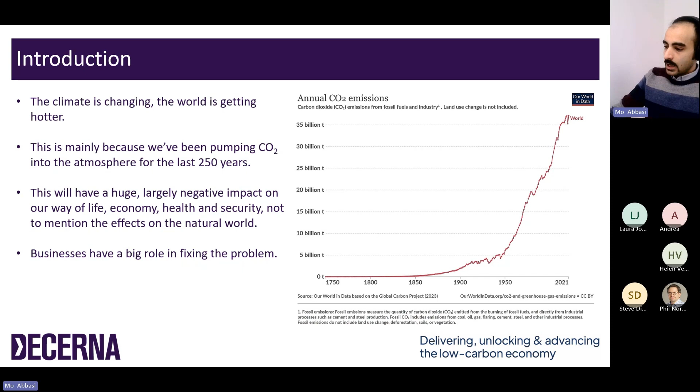Businesses generally play a big part in this, and can prevent or at least decelerate climate change, which apart from the carbon reduction and environmental impact, creates some side financial and other opportunities for your business and company. We will discuss them in the next slides. But why should this matter and why should we care about this?

When it comes to climate change and global warming, every half a degree matters. One might think it's okay, it's only 1 degree Celsius - I personally appreciate it, here in Newcastle it means a longer summer maybe - but it doesn't work like that. Global warming, even in very small temperature rises on a broad global scale, can have devastating results, directly increasing the risk of sea level rise, wildfires, extreme weather, species extinction, pandemics, drought, food insecurity, climate migration, and many other problems globally. All of these consequences are interconnected.

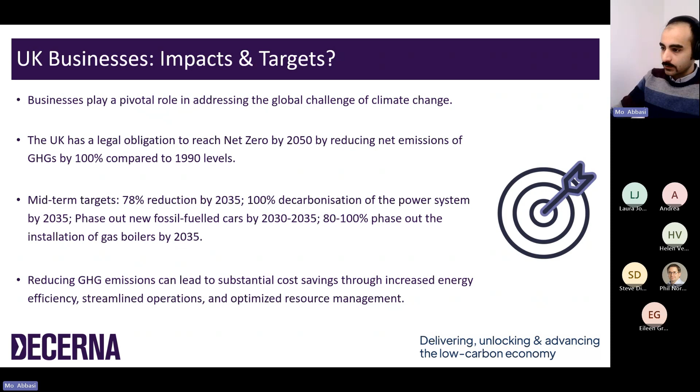These are the midterm targets and commitments in the UK, and businesses are an important part of that journey - they have to adapt to new regulations. Hopefully by the end of this session you will have the information you need to decide what options are available in the market for you to start this journey.

Let's start with some of the main principles we all need to understand before we're able to plan and design our decarbonization plans. The first and probably most important one is the emission scopes, which are the standardized way of categorizing greenhouse gas emissions based on their source. This categorization helps us account for all emissions, avoid double counting, and identify the biggest gaps and opportunities within your business.

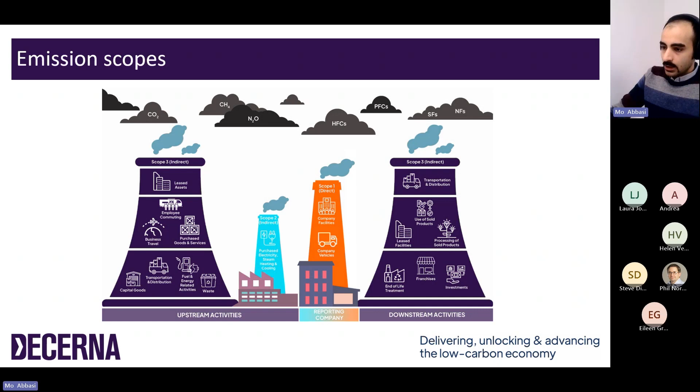But very briefly here: Scope 1 are the direct emissions from sources owned by the company. Scope 2 are indirect emissions from the purchased energy you consume at your premises. And Scope 3 is all indirect emissions from the company's operation phase. So today, the measures we're going to discuss mainly affect Scope 1 and 2 emissions.

Scope 1 covers the emissions from sources that your organization owns or directly controls. Some of the most obvious examples are the gas or oil burning in your boilers, company vehicles that are not electric, leaks from the refrigeration system, and all the refrigerants used in the equipment of your company.

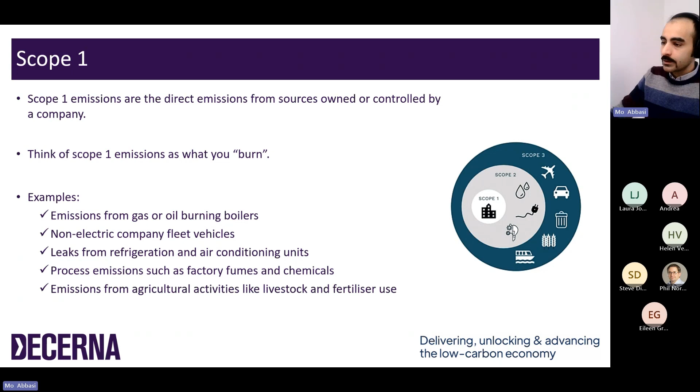Scope 2 emissions are GHG emissions associated with the purchased energy for your company. For most SMEs, scope 2 is just the electricity you buy from the grid, but you might have some heating from heat networks that goes under scope 2, or purchased steam for your industrial processes.

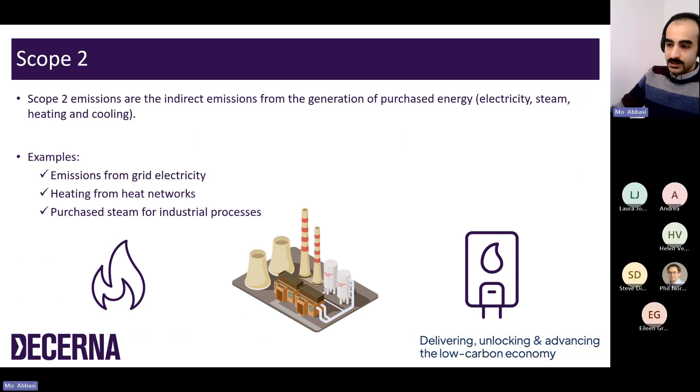Scope 3 are all indirect emissions associated with the upstream and downstream activities of your company's value chain. Basically all other indirect emissions not included in scope 2 can be categorized under scope 3, which for different businesses can vary between 50 and even 70-80% of the company's emissions.

Some examples are business travel on vehicles not owned by the company, staff commuting emissions, and purchased goods and services, for example raw materials, paper, coffee, IT devices, anything that you buy for your company, transportation of these goods, and also all emissions from own assets of the company.

For example, if you have any investment properties, any acquisitions, or other lending activities, they also need to be taken into account within the emission calculation of your company, and also the emissions related to waste management and disposal.

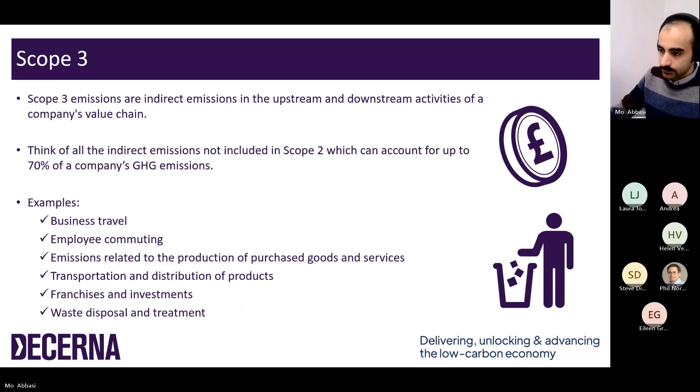But what does net zero mean? Net zero is actually the next fundamental principle that we need to comprehend here. Net zero refers to a state in which the greenhouse gases going into the atmosphere are balanced by the emission removals from the atmosphere. Achieving this balance between the emissions we generate and the emissions we remove or save from the atmosphere, we call it net zero.

It can be achieved through a combination of two main strategies. One is reducing the emissions as much as possible, and the second is compensation for emissions by equivalent carbon saving elsewhere.

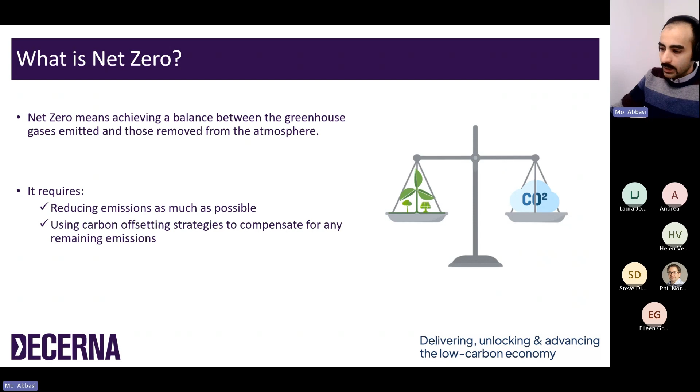Carbon offsetting itself can be achieved in two ways, basically two approaches. Firstly are the compensatory offsets, which means buying emissions reductions from elsewhere. It means you pay towards projects to reduce carbon emissions elsewhere, for example investment in environmental projects, renewable energy, waste management, and that sort of projects.

The second approach is carbon removals, which use some kind of technologies, for example carbon capture and carbon storage technologies, or tree planting and reforestation. But carbon offsetting alone is not enough and doesn't make you carbon neutral.

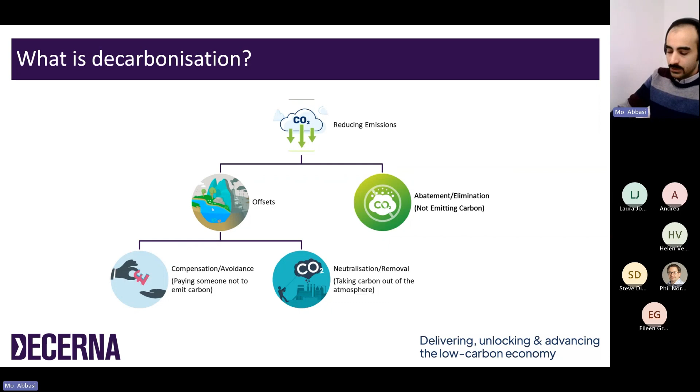This should be accompanied, as we said, by implementation of suitable measures to proactively reduce your carbon footprint. This means avoiding emitting GHGs in the first place. This approach we call decarbonization.

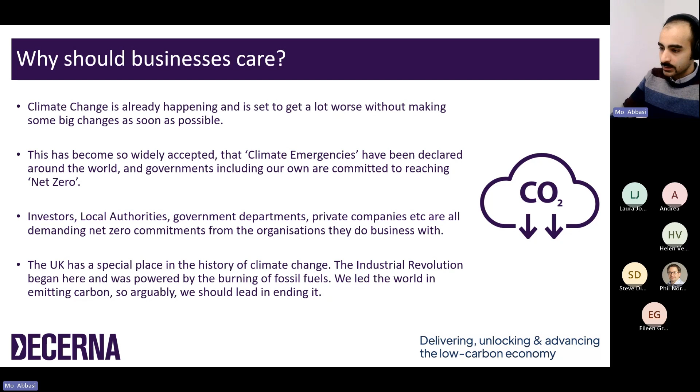So as a business, why should we care about CO2 emissions here? Apart from the first and foremost, obviously, the climate emergency and our social responsibility to tackle it, there are some other benefits to reducing carbon emissions for SMEs as well.

The first one would be reducing operation costs. Cutting carbon emissions goes hand in hand with boosting energy efficiency, which means lower utility bills and other expenses. So although taking actions imposes some upfront costs for you, at the end of the day, once you have implemented them, you will definitely save some money in the long run.

Also, it boosts your competitiveness in the market for your products and services, because customers are increasingly becoming conscious and caring about environmental issues. So carbon reduction boosts your brand value and reputation in the market.

It also helps you keep up with regulatory compliance. We have, for example, the CRP requirement for procurement for the government these days, which is a regulation recently set up for businesses who want to trade with government in major contracts. Also, getting ahead of regulations and market shifts positions businesses to thrive in the long term as this transition continues.

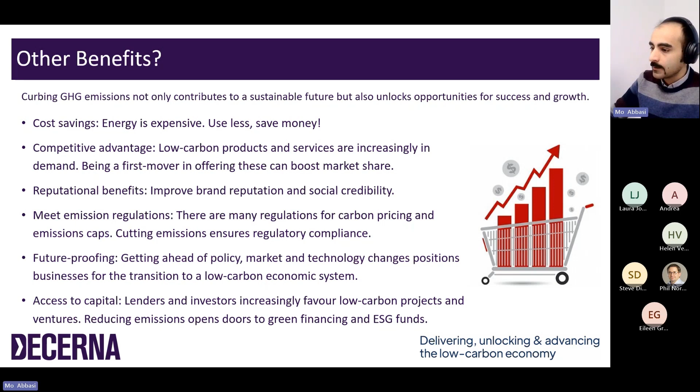And lastly but not least, it will enable some funding opportunities for your business and grants which are allocated to businesses who want to be green, and there are lots of local council and governmental grants that you can apply for and use for your company. But where to start our net zero journey?

In the third step, this is the step that we produce the carbon reduction plan, the CRP, which we touched on, and which is increasingly becoming central in the space, and is now the requirement for, as we said, major contracts with the government, and this is also one of the services that we provide. But today we are mostly focused on the

fourth and fifth stage. Based on this plan, the next step will be implementing the energy efficiency and renewable measures and emission reduction interventions. Basically, we also develop and implement some strategies to engage employees in the net zero journey and make the progress. At the end, the next step deals with the supply chain management, carbon offsetting, and monitoring processes, which are further steps for reaching net zero and controlling it.

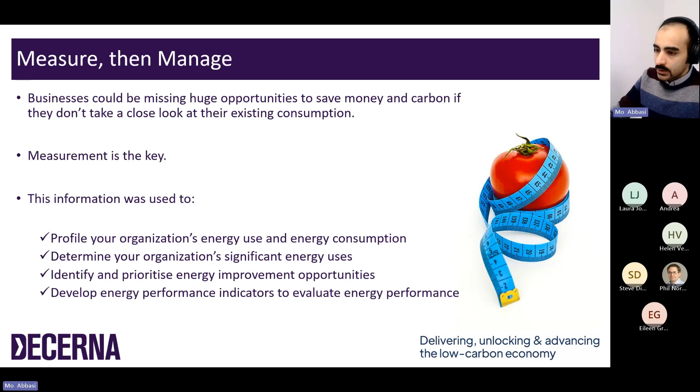And finally, this enables us to monitor the effectiveness of energy saving initiatives that we have implemented and make adjustments if needed. The energy data that we need to collect as the first step can be obtained by measuring the energy consumption from utility meters, for electricity and natural gas, mainly located in the property. These data are often available in the utility bills, but more regular monitoring is also highly recommended to keep a record of the energy usage in shorter intervals, for example, every week or even every day.

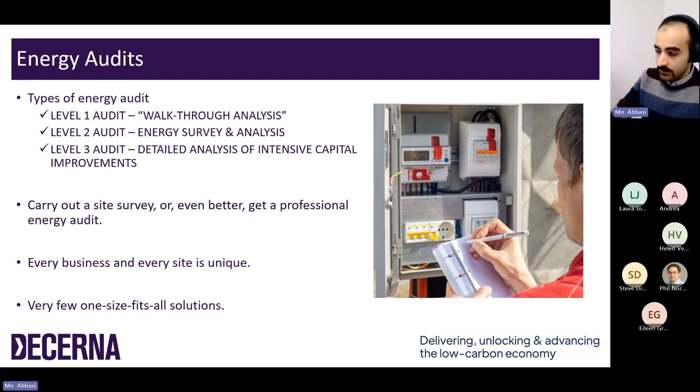But just that first level of energy audit gives you enough information to identify areas that require immediate attention and come up with some purpose-built and customized measures to reduce energy consumption and also boost your environmental performance. Or, for level 2 or level 3, you can hire a professional energy auditor to conduct a more comprehensive one. But most of the quick win measures that we're going to cover today can be done based on the level 1 energy audit.

But let's give some top tips to help with energy audits if you want to do it yourself. Basically, we need a record of all the energy consumption within the company: how, where, and when the energy is being used, and what the regular routine of energy consumption is. Therefore, first of all, we need as many photos and notes as possible. You need to take photographs of building features, for example the windows, insulation, HVAC systems. We need to take photos of lighting fixtures, appliances, and plug loads.

Also, we need photographs of equipment nameplates, where we can find their make, model, serial number, power rating, and information like that. Also, we have to make notes of the runtime hours, the temperatures, the environmental conditions, notes that might be helpful in the future for planning and designing energy efficiency measures. We also need to speak to regular users of the equipment and appliances at the premises, and ask them how and how long they use appliances or equipment, if they perform well, or if they seem to have some problems.

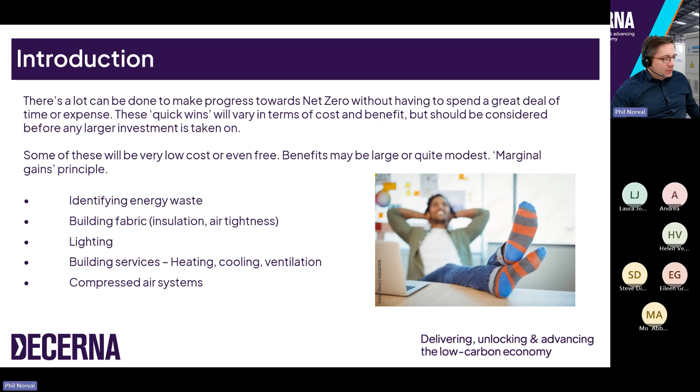And then beyond that, I'll go on to talk about a few what-not-to-do's, and some mistakes that we've seen in the past. And after that, I'll jump into a separate session just to introduce some concepts around renewables. So after the quick wins, we'll talk about the slightly more costly renewable energy systems for a little bit.

So firstly, identifying energy waste. We do an awful lot of site surveys, and as Mo mentioned, quite often a fresh pair of eyes is as much a benefit as any expertise that we might be bringing to the site. It's often the case that people are so heavily focused on doing their own work, working to their strengths and just carrying out their day-to-day duties, that they're not necessarily concerning themselves too much with energy efficiency, which is quite understandable.

Energy efficiency is not always the most convenient thing to consider when doing your work. For example, if it was in a factory, somebody might leave one of their tools switched on or one of their machines switched on just because it's convenient to have it on and ready for when they next need it. But it may be using energy the entire time it's on, even if it's just sitting on standby or idling. And that's a potential source for energy waste.

And it's things like that that businesses often overlook or just don't have the time or resource to consider day to day, and often they'll become blind to a lot of these things because thinking of it in any other way is kind of a hindrance to just going about the normal day-to-day work.

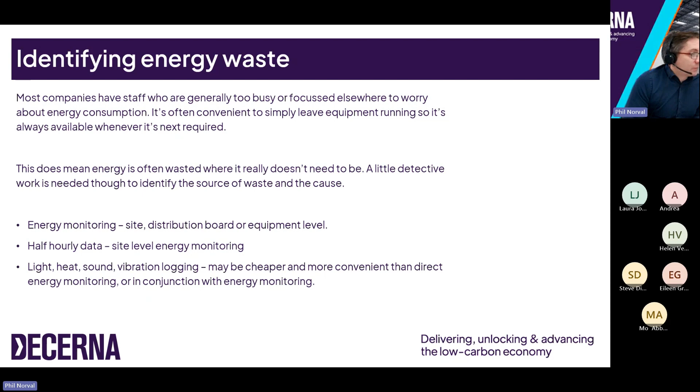You can just record the sound or the vibration of that equipment, and that would indicate when it's been switched on and when it's been switched off, and from that you can then work out how much energy it's consuming and how much of the time it is operating, and if that time-use profile matches the work schedule, or if equipment might be getting left switched on outside of working hours, for example.

Excuse me, sorry. Yes, so we'll jump into the building fabric improvements, namely insulation and draft proofing.

There's, as with many things, a sort of logical hierarchy to approach this with, and specifically talking about building fabric, there are a number of different improvements that you might consider making, draft proofing being one of them, and the various kinds of insulation improvements being the others. There's a general order in which these things should really be considered. The logic being that you should implement the lowest cost improvements with the highest impact first, and work from there down to the highest cost, lowest impact measures.

And the general case is that draft proofing is by far the lowest cost improvement that you can make, and also has one of the highest impacts in a lot of buildings, particularly old ones where there's a lot of draftiness and air leakage through things like the sides around window frames, under doors, cracks in walls, even between the walls and floors of buildings.

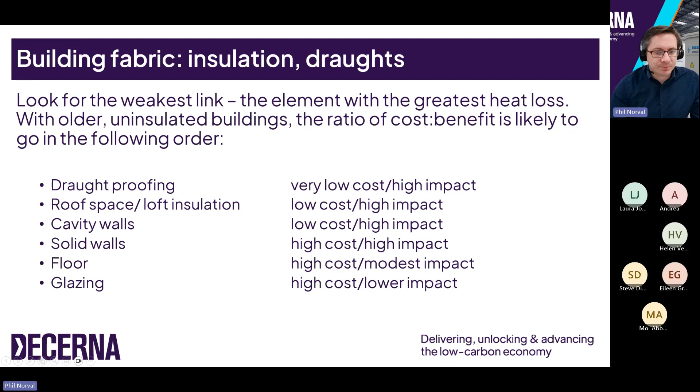Just bear with me a sec. So, as I mentioned, draft proofing is the thing to do first, especially if you're looking for low cost options, or even no cost options in some cases. It's usually such a low cost with such a large impact on energy efficiency that it's probably worth doing without worrying specifically about how much energy it will save or cost to install, because it's a technology that can generally be installed on site.

By unskilled staff, with no specialist training needed. A lot of the products used to draft proof a building are designed for consumers to install. The drafts in buildings, poor air tightness, are often the biggest component of heat loss in a building, particularly in commercial buildings. Therefore, it's probably worth making sure drafts are eliminated wherever possible, without needing to run a feasibility study or business case assessment.

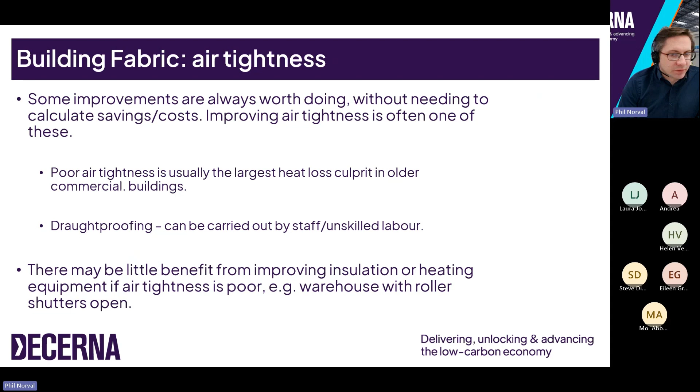So when it comes to draft proofing, there's actually more than the simple effect of reducing heat leaking out of a building. There's actually a compound effect that makes it doubly effective for the comfort level experienced by people in a building. Not only does sealing up drafts prevent heat escaping, it also reduces the amount of air movement in a building.

So you've all heard the term wind chill. That's an extreme version of this, but basically the more air movement there is, the more of a cooling effect there is on people's skin. You'll be familiar with the feeling of sitting in a draft, and that's not necessarily cold air blowing on you. It's just the fact that there is air moving at all. Air at a given temperature feels cooler if it's moving than if it's stationary.

So drafts in a building will increase the amount of air movement, and therefore for people to feel comfortable, the temperature needs to be that little bit higher where the air is moving around more. So sealing up drafts will have that double effect of preventing heat loss, but also making people just feel more comfortable at any given temperature.

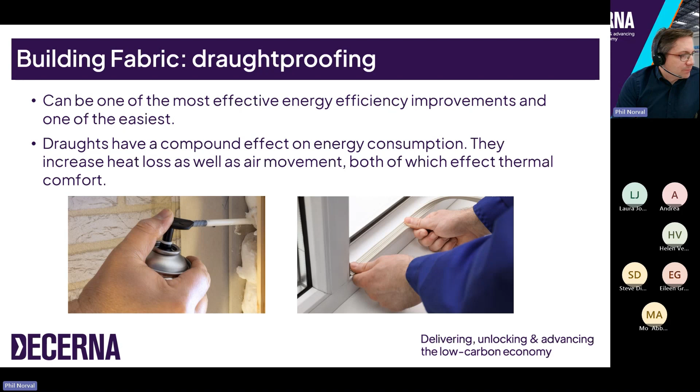When it comes to draft proofing, it's worth doing a kind of site survey to assess where air is leaking. It's quite easy to identify drafts, you can feel the cool breeze wherever there is a draft, as I'm sure you're aware. But it's worth carrying out one of these surveys even if you think air tightness improvements have been installed sometime in the building's history.

Over time, things like the foam rubber seals around windows and doors can deteriorate or can be painted over. It's quite common to see these draft seals being gloss painted, and then they become far less effective, and they can become compressed and begin to allow drafts to re-emerge through those openings. So it's worth going around and seeing if those seals are actually doing their job, and it might be worth replacing them or adding more sealant into those areas.

There are cases though where simple improvements like adding foam or brush strips or tape just aren't up to the job. Buildings do move over time. Things like window and door frames and other joins in a building can open up, and it can become such a problem that you need some professional help.

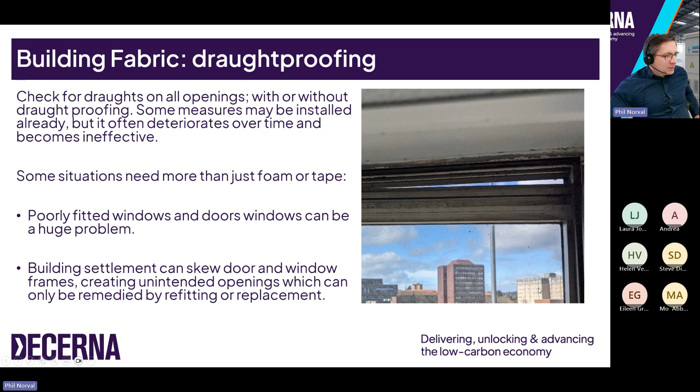As I showed a few slides ago, there's this hierarchy of building fabric or insulation improvements. So talking about insulation itself, once you've sorted the air tightness of a building out, it's worth thinking about the strategy for improving insulation, sticking to that kind of hierarchy.

If it's possible to insulate your roof space, to carry out loft insulation, that's usually the cheapest and one of the most effective things to start off with. It doesn't require a great deal of skill to install, doesn't require much disruption, and there's very little cosmetic remedial work required afterwards, because the loft insulation is usually out of sight with no actual fixing down required. So the cost is pretty low.

Similarly with cavity wall insulation, usually that's a similar price per square meter of insulation, but it's usually not as thick, so the energy savings from it aren't quite as good as loft insulation. But you can see in this table the general cost per square meter and the payback period goes in that kind of order down to, after cavity wall insulation, there are options for solid walls where there's no wall cavity.

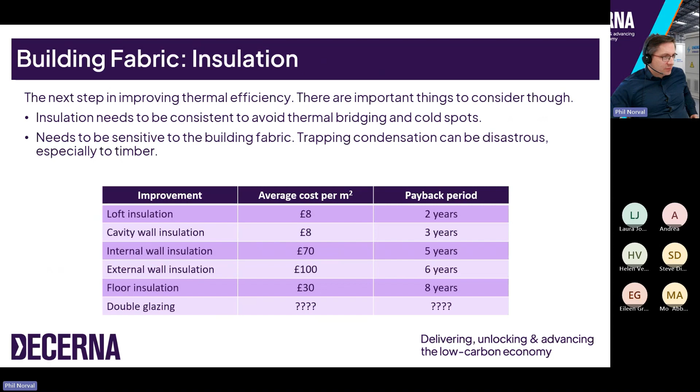So right down at the bottom here, double glazing. It's a really popular thing to install and for people to want to install. I did indicate it's down at the bottom there, but I wondered if anyone might have an idea of how long it takes for double glazing to pay for itself. In other words, if you have a business that installs double glazing to replace old single glazed windows, how long do you think it might take for the energy savings to pay for the initial cost? My colleague Helen is going to unleash a quick poll on you, just so you can have a guess.

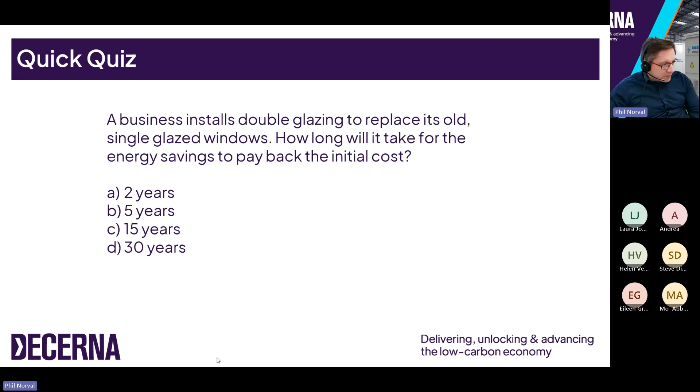So that was building fabric. I'm going to jump into LED lighting briefly, which is something that is pretty well understood now, and it's pretty well accepted that LED lighting in most situations is going to save energy compared to the older lighting types. And in fact, now it's really the only option that you have in almost all situations for new lighting.

There was a phase out that happened last year, towards the start of the autumn last year, which made it illegal for manufacturers to produce any new fluorescent lighting tubes. So even the more energy efficient thin type, what they call T5 fluorescent tubes, but also the older types of fluorescent lights, industrial lighting like metal halide, or I think high pressure sodium as well, not because of energy efficiency, but because all of those have some amount of mercury in them.

It's the environmental impact of disposing of them that meant they were no longer acceptable. And once retailers have sold out of all their old stock, you won't be able to buy them anymore. So LEDs in nearly every case are the only option left.

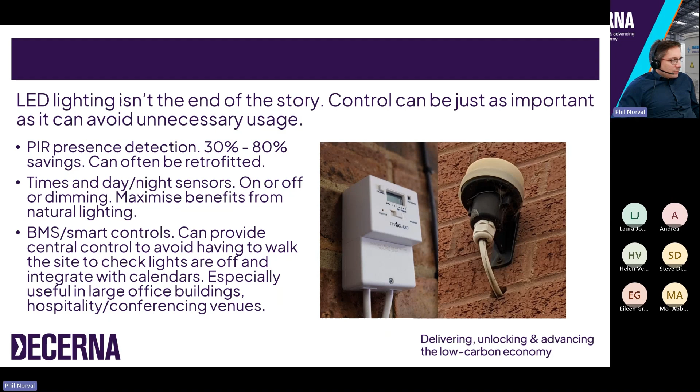It's worth being aware - I mentioned security lighting and outdoor lighting, but the traditional way to control these things is often with one of these mechanical time clocks. If you ever look in a plant room or a meter cupboard, it's quite common to see one of these, as shown in the photo there. They do a job - they switch lights off at a certain time of day and switch them on at a certain time of day - but they're very limited, and they're often completely ignored. So when they're installed, they're set up in a certain way and then never touched again. They're not always set appropriately for the current use of the building.

They only have a single on-off setting, so the major problem with them is that they operate in exactly the same way 7 days a week. If you have a car park with lighting controlled by one of these, for example, you may not need that lighting on over the weekend when there's nobody there. You probably don't need the same settings in the summer as in the winter, so these kinds of controls are not particularly smart. In the case of a site that's closed during the weekend, you might be using 2/7 more energy than you actually need to - there are two days out of 7 that you don't need that lighting on, but this control type isn't sophisticated enough to deal with that.

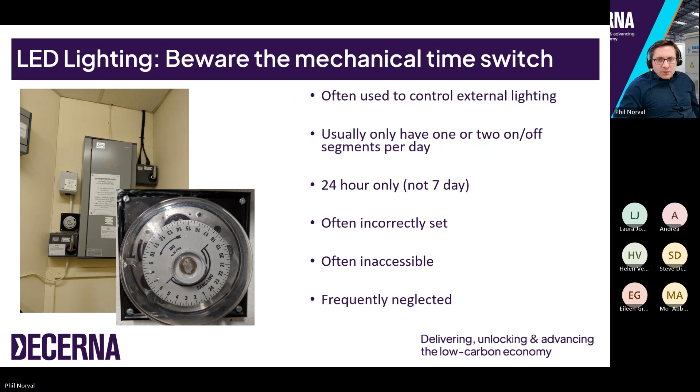So jumping now into - I'm just going to check the time actually. Oh, we're okay. So we'll talk now a bit about heating, ventilation, air conditioning, or HVAC for short.

Some elements of this people will be pretty familiar with, specifically the heating side of it, but the ventilation and air conditioning is something usually left to experts to understand. But there are things to consider that don't need a great level of expertise to make improvements to.

In general, there are some things to consider with these sort of systems. I recommend that somebody in your company takes a look at least once every 6 months at things like the time settings for heating, ventilation, air conditioning, and the temperature set points they've been programmed to.

The reason I say at least once every 6 months is, especially where there's heating and cooling in a building, you have a heating season which usually starts around October and ends around March or maybe April. Conversely, you might have a cooling season which covers the other half of the year. So these heating and cooling seasons run for half the year each, and if you don't check the settings at the start of that season, you could incur significant energy waste throughout it. So there's an opportunity to revise the set points and programs before the heating or cooling season each year, so that you don't end up hitting yourselves in the wallet by having inappropriate settings.

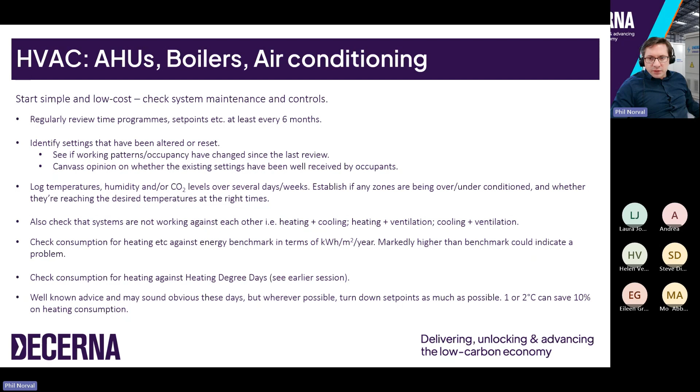Yeah, so that's some general points for heating systems, but getting into some more specifics, talking about simple improvements in terms of lagging of pipework. Again, this is something that can be done by non-specialists very often, unless it's a really sophisticated commercial plant room. But it's really common when you go into a boiler room to find there's lots of pipework that's not insulated properly.

And it's one of the worst places to have uninsulated pipework, because boiler rooms in particular are usually very, very highly ventilated, where there's a commercial boiler, because they need air to mix with the fuel to burn properly, but also the ventilation is to get rid of anything like carbon monoxide that might have collected if the boiler's not operating properly. So it's a safety issue as well.

But the effect of having that much ventilation in a boiler plant room is that the space is effectively outdoors. The indoor air is mixing so quickly with the outdoor air that you're basically exposing any unlagged pipework to the outdoor air. And if you imagine the temperature of the outdoor air versus the temperature of the pipes, the heat lost to that air can be huge.

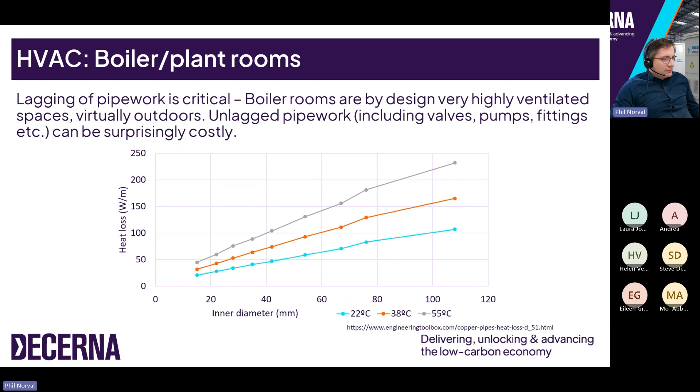So even pipes that are in the indoor space, the heated spaces, if they're unlagged, it represents heat loss that's completely uncontrolled. So if a boiler is running, but a particular room doesn't have its radiator switched on, the pipes feeding it will still be hot, and so they're giving heat into a room that doesn't require it. And so entire sections of buildings can have their heating switched off, but the pipes are still hot. And so without lagging those pipes, it represents a huge source of energy waste, or at least lack of control of the heating system.

Any pipework that is out of sight, particularly above ceiling tiles or in roof spaces, is often left uninsulated, and those spaces are not classed as part of the heated space. And so without lagging those pipes, it can be a huge source of energy waste. Above ceiling tiles, it's really common that there's openings in the walls at the sides of those spaces to let pipework in or to ventilate them for some reason. And so again, the outdoor air is circulating really well around those pipes, and the heat loss therefore can be really, really high. And because it's out of sight, it's often out of mind.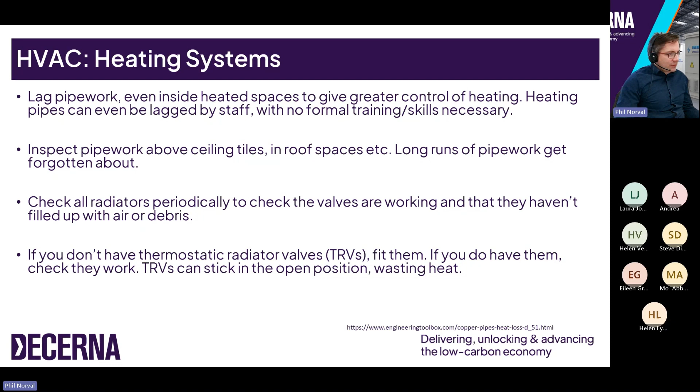But either way, it's either zero cost or very low cost to improve it, and it can save, particularly in a room that isn't in use, a huge amount of energy, because it can be the difference between a radiator operating at full blast or being switched off. And so it's another thing to consider during a site energy survey, just to verify that those valves are actually working properly.

So we've talked about heating systems, but another related area is domestic hot water. So the hot water that comes out of taps and showers. It's usually a smaller overall energy consumption, but it's quite often the source of a lot of unnecessary consumption as well, particularly in larger commercial buildings where they have what's called a secondary circulation system. If that's not something you're familiar with, basically you will have experienced being in a building where the hot water tap is a long way from the boiler or the cylinder, and it takes an age for the hot water to come out of the tap.

To avoid that happening in larger buildings, it's common to have this loop of pipework around which hot water is being continually pumped, so that there's only a short distance from that loop to the actual tap or shower outlet, so that for the convenience of people in the building, the hot water is readily available without having to wait for it to come through. So it's a really nice, convenient thing to have, but as you might imagine, that loop of pipework is nowhere near as well insulated as the cylinder it might be coming out of, if it even is insulated. It's really common to find these secondary circulation systems have no lagging on the pipework, either in the plant room or around the rest of the building.

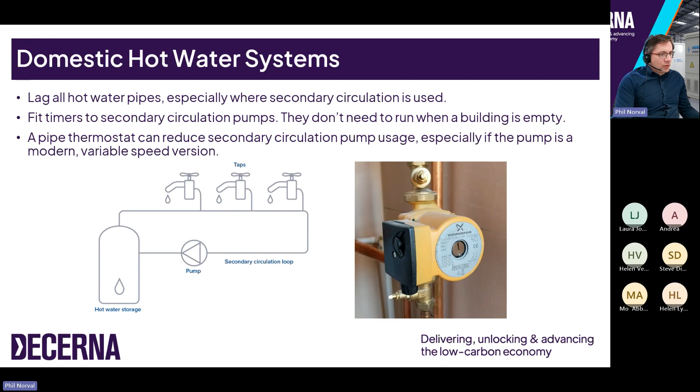This is a bit of a counterintuitive thing to consider, but in buildings where there's really long runs of hot water pipework to the outlet, potentially. So if there's a boiler room at one end of a building and a hot water outlet at the other end of a building, there could be a huge amount of heat lost just in the pipe that takes the heat from one end to the other.

And so although something like a gas hot water system is comparatively pretty cheap per kilowatt hour of energy compared to something like an electric hot water heater, the fact that that sort of situation can lose so much heat to the environment through the pipework means that the alternative option of putting a simple electric water heater at the point of use can actually be significantly cheaper than sending heat all the way from the boiler to where it's needed.

Also, in some situations you might be heating up an entire 100 or 200 litre hot water cylinder just to provide hot water for the short amount of time it's needed at the other end of a building. So in that kind of situation, you're heating up far more water than is actually needed for the demand. And so something like a small point of use electric water heater can be tailored to the demand a lot better. And so although it's more expensive per kilowatt hour, the number of kilowatt hours used can be much lower by that setup. It's a bit counterintuitive, but in some situations it's probably worth considering.

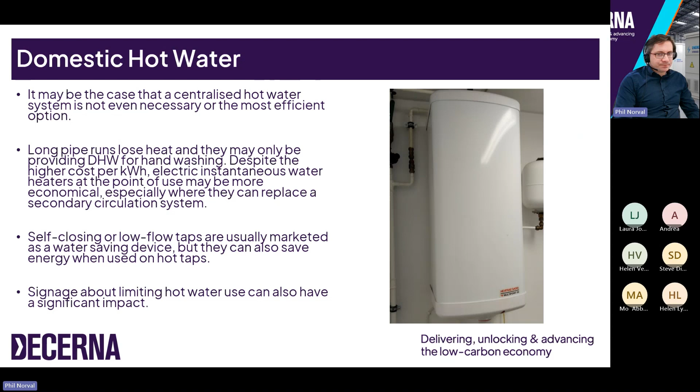So if it's possible, if you're looking at upgrading a ventilation system, getting some sort of automatic control with variable speed fans will definitely save a lot of energy.

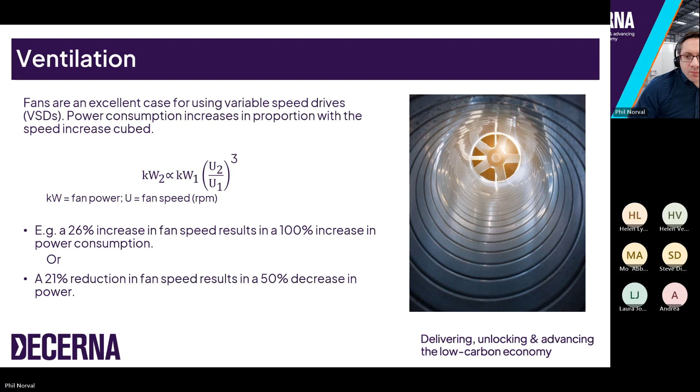Moving on from ventilation, just briefly to air conditioning. It's increasingly common in this country to have air conditioning in buildings, for two reasons. Partly climate change, as temperatures are getting higher, particularly in the summer in the UK, but also there's been a trend to have more electrical equipment in buildings than there were historically, particularly in modern offices. You've got so many computers, printers, and other electrical devices, for either productivity, convenience, or luxury. The number of electrical items in most buildings is much higher than it used to be, and all electrical items give off some amount of heat. It's more obvious with things like printers and photocopiers, but collectively the amount of heat given off by electrical equipment has gone up a lot over recent years.

That increase in heat is often combated with air conditioning. But before anyone installs any new air conditioning or switches the cooling on in a building, it's worth considering: is it even necessary? Are there other ways to reduce the temperature of the air in a space other than just switching on cooling systems?

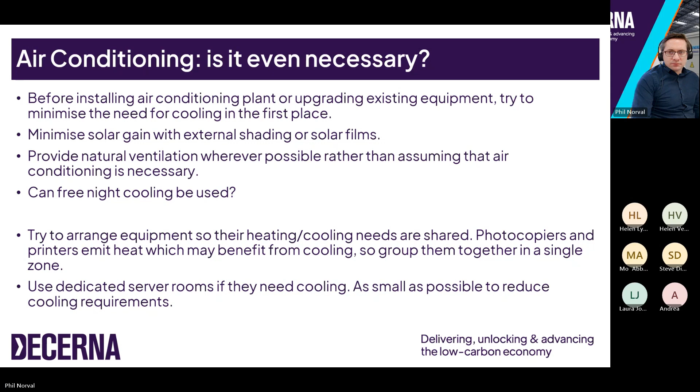Similarly to ventilation systems or HVAC in general, ensuring they have been properly and regularly maintained is key to their efficiency. So where you do need air conditioning, make the most of it and make sure it's properly maintained.

Often, similarly to mechanical ventilation systems, the outdoor units are nearly always installed high up on a wall or on a roof somewhere, so they're usually completely out of sight of most people in the building. They get forgotten about if there's not a regular maintenance program in place, and it's assumed they'll just continue to work forever without any intervention. But air conditioning units have heat exchangers with aluminium fins all over them, and they'll get a buildup of dirt and dust, and even weeds will grow up around them. Birds may build nests next to them. They gather dirt and dust really quickly, and if not properly cleaned and maintained, their efficiency will drop off a cliff. So getting somebody to look at them at least once a year is really important, along with checking the refrigerant pipework carrying cooled refrigerant into the building, making sure it's properly insulated and the lagging hasn't deteriorated or been chewed by rats or pecked by birds. That has a really high impact on the performance of the system.

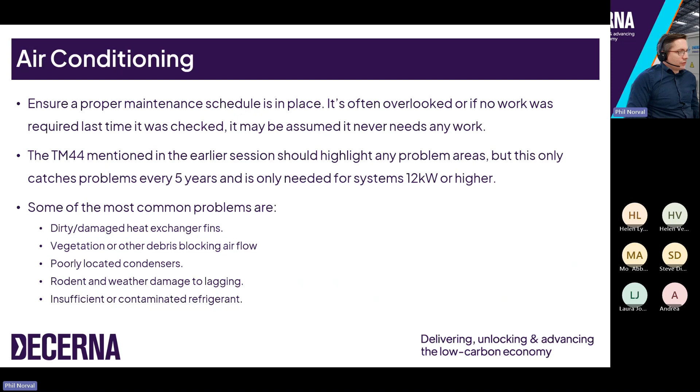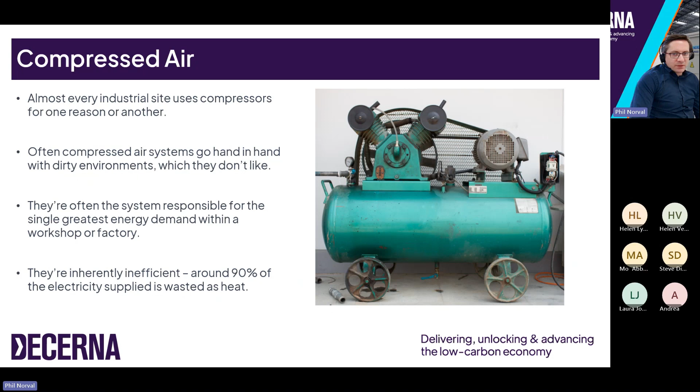The ongoing air distribution system, the air lines and pipework around a site that takes compressed air from the compressor to the tools and machines that use it, is something that needs to not be ignored. It's really common when we visit a site with a compressor that there's a deafening hissing sound coming from all sorts of places around the building. That hissing noise is compressed air leaking out of tools, pipework, or fittings. Usually that doesn't need to be happening, but these hissing noises in a noisy factory often just get ignored.

Like we said about having a fresh pair of eyes on site, a fresh pair of ears is really helpful in these situations, because people do over time just become deaf to these kinds of leaking noises. Getting somebody who isn't always on site to have a quick listen, they'll be able to remind people or point out where there is air leaking if it has been ignored.

If the environment is so noisy that you can't hear air leaking, there are relatively inexpensive ultrasonic leak detectors. Ultrasound is really directional and can be easily picked up by these detectors, showing you which direction the sound is coming from, so you can actually pinpoint the source of air leakage. They can be quite effective to find them.

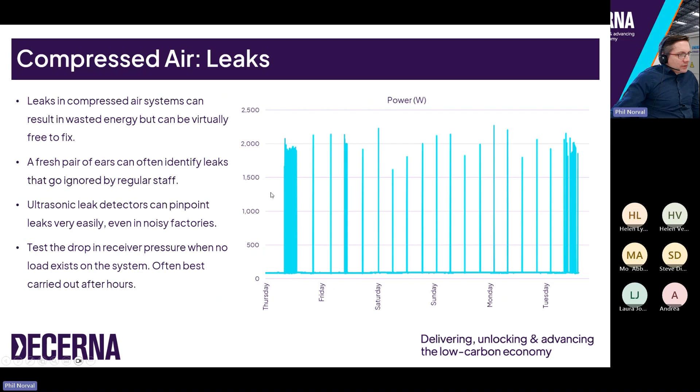I'm just going to do a quick quiz question. You've already seen it earlier on, but now that you can see the context, we're going to run a quick poll to see how much you think a fairly modest air leak might cost per year. So if you have, for example, a flexible hose with a 3mm split - pretty small split in the hose - how much do you think that might cost a business on average per year? There'll be a poll coming up in just a moment.

Okay, so yeah, a mixture of responses there. Most people think £1,000 a year. That might have been true a couple of years ago, until energy price inflation went through the roof. It's actually closer to £2,000 a year just for that tiny little 3mm split in a pipe. So you can imagine in a factory where there are several of these leaks, just getting a small, almost zero cost repair done.

It might even be a case of tightening a pipe fitting - virtually zero cost to fix these leaks can rapidly amount to thousands of pounds saved each year. So it's one of these things that seems really small, but it can have a huge impact on the cost of energy for a business.

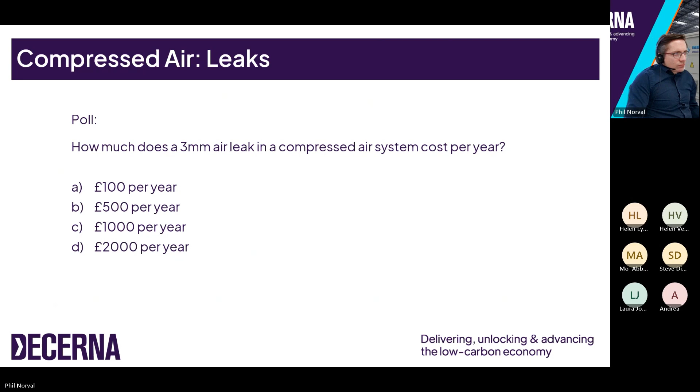So just a little bit more on compressors. Reducing the overall demand from compressors is the easiest way to save energy. Firstly, it's really common to find that the set point pressure of these things is higher than any of the equipment using the compressed air actually needs. If you can reduce the pressure set point from, say, 8 bar to 7 bar, you'll be saving literally thousands of pounds a year if the compressor's used all the time. So carry out a review of the equipment using compressed air and make sure the compressor isn't set too high for it.

Again, older compressors or smaller compressor systems will have some sort of drain system to get rid of any condensate, any water in the air that's in the pressure vessel.

Some older systems, the only way to get rid of that condensate was just to dump all the compressed air out of it. And I've seen sites where people drain the entire compressed air system on a daily basis just to get rid of any water in the system, because water is quite damaging and will corrode the pipes and the pressure vessel over time and could become quite dangerous.

So getting rid of the water is important, but modern pressure vessels should have some sort of drain that doesn't require venting all of the compressed air out. But also, particularly with larger systems, you can get air dryers which take out the humidity in the air before it gets into the pressure vessel.

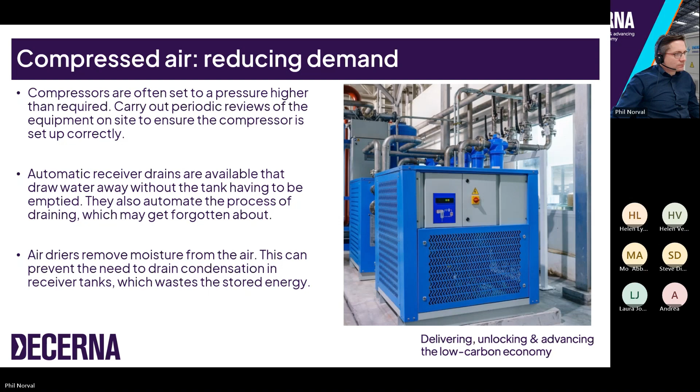Finally, on compressed air tools, particularly things like wrenches and sanders and that sort of stuff, air hand tools in particular, they're really traditional, really common, because they're so powerful and portable, and they're really, really common in factory situations.

But because things have come quite a long way with cordless battery-powered tools in recent years, it might be worth seriously considering not using air tools at all anymore and replacing them with modern cordless battery powered tools, just because they're so much more efficient, probably safer as well.

But if you remember that a compressor is inherently at best about 10% efficient, once that compressed air gets through the mechanics of the tool and down the air hose, the overall efficiency is going to be well below 10%. Compare that to a modern lithium-ion brushless motor powered tool, the efficiency of that could easily be over 80%.

And so the energy consumption of it—they only use energy exactly when it's needed, as opposed to having a compressor on all the time. So the energy savings from those kind of tools could be absolutely massive if that's what the compressor is used for on any particular site.

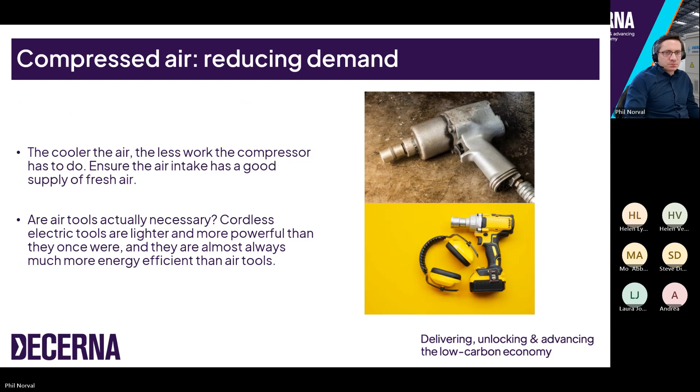Coming towards the end of these slides, weirdly, I'm going to talk about where to start now that I'm coming towards the end of this session. But overall, just some general pointers: try to take a whole-site, holistic approach to energy consumption and energy savings, so that you can take a more strategic approach, dealing with things in a way that ensures the overall system is as efficient as possible.

In the way we were talking about with the LED lighting earlier, taking that whole-site approach can identify savings that you otherwise might not think of if you look at things individually. So to do that, carry out a site-wide energy audit to identify as many opportunities to save energy as possible before implementing any specific one of them.

So you can then identify the low-hanging fruit, the things that are going to have the biggest benefit for the least investment, and start with those, then work down to the things that are perhaps going to cost more or have a more modest benefit. Develop that kind of holistic strategy across the site, and that should ensure you spend money more wisely, and reduce the need to spend an awful lot of money early on.

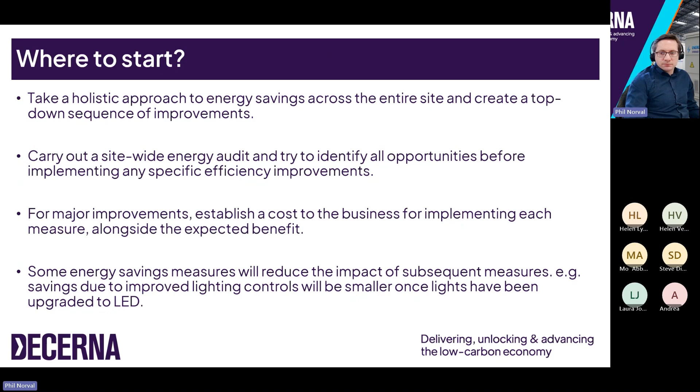So firstly, destratification fans, ceiling fans, as you might be more familiar with. Particularly in buildings or rooms with a really high ceiling, it's quite common to see fans at the top of them. And people quite often think that switching them on in summer is a good idea because it'll create a breeze in the room and cool people down. But that's the exact opposite reason of why they're usually installed. They're called destratification fans because that's what they're designed to do. They're designed to prevent hot air from rising and sticking at the top of a building or of a room.

Switching the fan on disturbs that layering effect of hot air at the top, cold air at the bottom, and pulls the hot air back down to ground level and mixes it up. So if there's hot air collecting in a building in summer at the top near the roof, switching those fans on will have the opposite effect on people. It'll actually make it even hotter for them. So I've seen that quite often, and it's a bad idea if people want to be cooled down in summer with one of those fans.

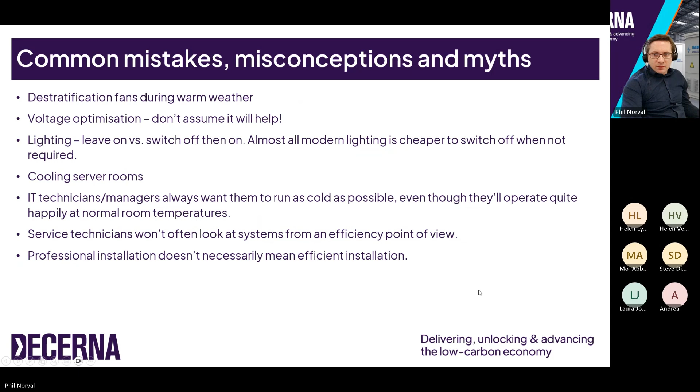Finally, we don't have time today to talk about user behavior. That's a separate session on its own, really. But it was quite popular, quite common to see energy efficiency campaigns such as the reminders to switch lights off in labels and things next to light switches, next to taps. They've gone out of fashion, and it's a real shame because they do work. There's complex psychological reasoning behind doing some of this sort of stuff, but the fact is that these kind of campaigns do work.

Consider just doing simple, virtually zero cost things like putting some awareness posters about energy efficiency around buildings, putting reminders at the point of use for equipment that uses energy, such as near light switches, and reminding people to close doors to reduce air leakage. Tiny little simple things like that can just nudge staff into a more energy conscious way of behaving. It's very hard to actually measure the impact of, but it's probably worth doing anyway.

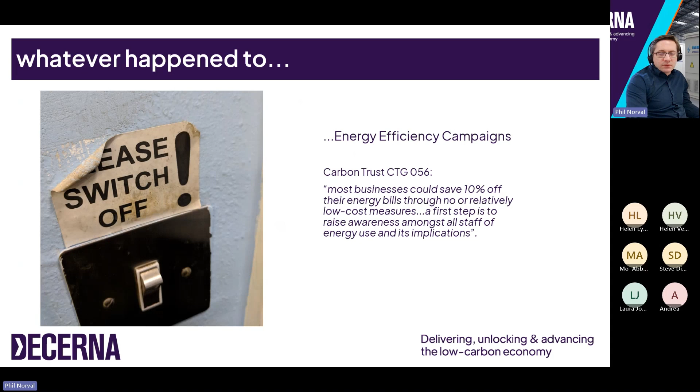Right, I'm just going to show you a few slides of examples of what not to do. Here's some air conditioning units installed outside to avoid causing an unsightly eyesore. They're hidden away in this little alleyway alcove area, but it's one of the worst places they could have been installed for energy efficiency, because there's a ceiling, an outdoor cover above them, which means that the hot air that they're rejecting to provide cooling in the indoor space is just going to be collecting in that area.

It's got nowhere to go, and that's going to make the whole system work far less efficiently. They need a good supply of fresh air circulating around them to work properly. They're also blowing warm air on each other, which is even worse than that stationary warmed air. They almost couldn't be in a worse place outside. The only worse thing would be to install them inside somewhere.

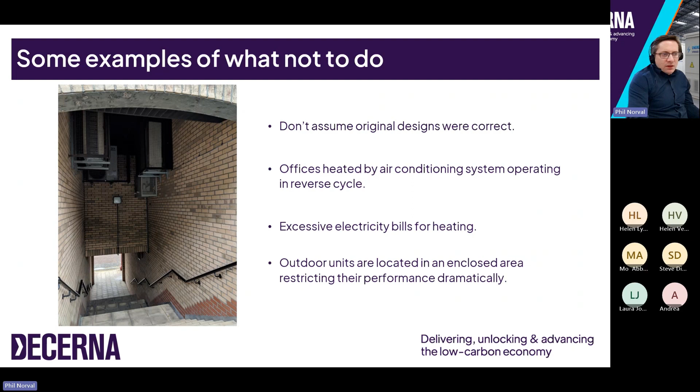Here's another example of something fairly silly. This was a fashion design and retail company that created these design offices within what used to be an open plan office space, and you can see the sort of UPVC double glazed partition on the right hand side there. Behind those partitions are where the design offices are, and this corridor is where all the radiators are from what used to be the open plan office.

And so there's, I think, six great big double panel radiators there, blasting away, kicking many kilowatts of heat just to warm that corridor up. And right above them is a load of very leaky single glazed windows. So all of that lovely double glazing on the partitions is providing almost no benefit, and all it's really doing is ensuring that as much energy as possible is escaping out of the building from the corridor.

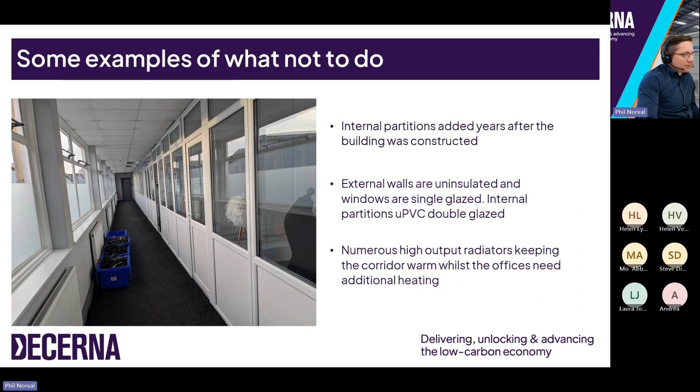And funnily enough, at the same site here is another good example of what not to do. This is a warehouse where all of the fashion items are sold and dispatched from. Within this space, though, you can see in the middle of the picture there's a single story concrete block built internal space that's been created. I think it's a photo studio that's inside that. It's got a sort of flat roof built within the warehouse itself. What they failed to do was think about the lighting, though.

So everything else in the warehouse has been left as it was, and on closer inspection you can see these light fittings that have been highlighted. All they're doing is lighting up the top of the flat roof above that photo studio, and I think they're 400 watts a piece. We worked out about 3,000 kilowatt hours a year in wasted energy from those two lights that are doing absolutely nothing for the people in the building. And you can imagine it's going to be about £1,000 a year that's being wasted just by not considering things like the lighting setup when they built that new space.

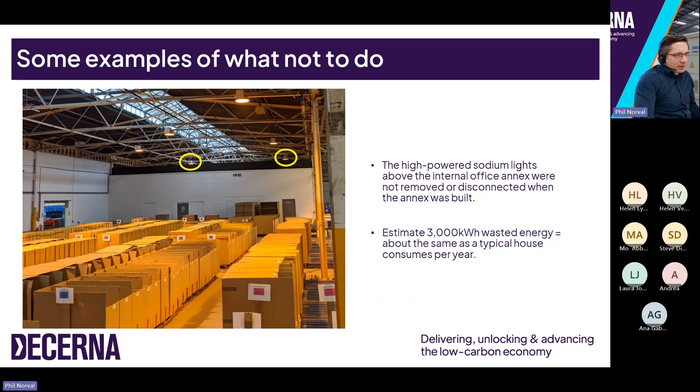So generally, for decarbonisation, the general approach should be reduce consumption first before jumping into more exciting things like renewable energy. Reducing consumption is not something that people get anywhere near as excited about as fancy new equipment like solar panels. But if you want to have the biggest impact for the least capital cost, then this is the way to go. When it comes to the heating or cooling of buildings, take a fabric first approach. So look at draught proofing, insulation, maybe glazing before you think about installing something like a new boiler or a heat pump.

And also in general, decide if you really need equipment, if something is actually essential to the business. Are there different ways of providing the same function in a way that doesn't use energy? Much as we considered the air tools versus cordless power tools, there are quite often more modern alternatives that serve the same purpose without using as much energy. So just try and think a bit more laterally about equipment and functions and operations of the business to see if there's another way of doing things that doesn't necessarily have to use energy in the same way as it might have once used energy.

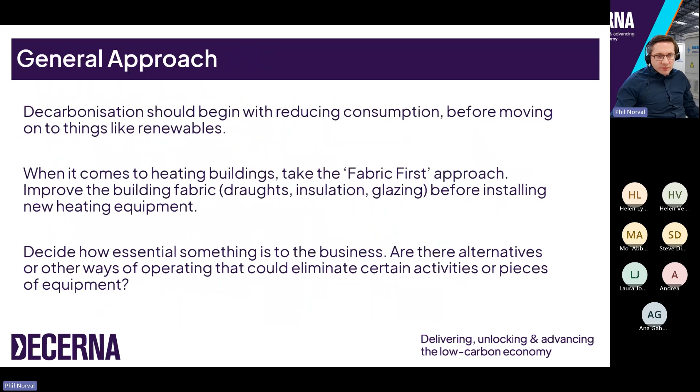We'll jump into a bit of a session about... Oops, where are we? Jumped far too far ahead in this. Sorry, here we go. So yeah, renewable energy. We'll do a quick introduction and talk about the various different technologies available, the more common and beneficial ones, at least, for businesses in the UK.

You may be familiar with some of this, you may not, but it's going to be a bit of a whistle-stop tour of renewable energy systems. So it's not so much quick wins, but if you really are interested in installing any renewable energy systems, then having a decent basic background understanding of what it's all about is a really good starting point, so that you know if it's going to, at least in principle, provide you with some benefit or not.

So we'll start with the most popular thing, solar photovoltaic energy, PV. It's all the rage for good reason, because it's come down in price so much in recent years. The cost per panel did go up a bit. With energy price inflation, it was so in demand that the cost of the equipment went through the roof, but it's come back down again now to the point where it's pretty much cheaper than it's ever been. And it's very, very reliable.

And it's also something that people have a decent intuitive understanding of. It takes light from the sun, turns it into electricity, job done. So everyone can appreciate that and understands that it's providing effectively free energy from the sun. And most places have some kind of roof space that it might be able to be fitted to. So it can be applied in the vast majority of locations, with a few factors that might affect that feasibility, though.

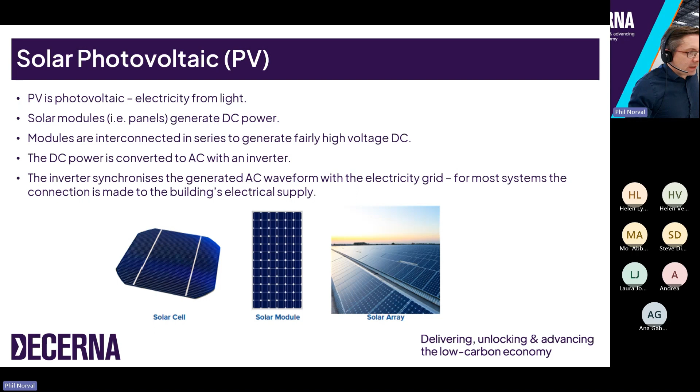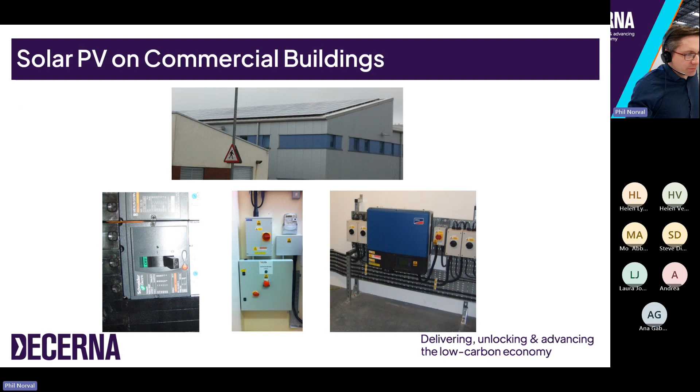So a few considerations around the performance and feasibility of PV. Firstly, as you might imagine, the power generated depends on the amount of light that's actually hitting the solar modules, and that is going to be impacted by various different factors. Obviously, if there's any shading on solar modules, that will impact the amount of energy that is being generated.

But it's important to know that in a simple standard installation, any module that has any shading on it will actually restrict the power output of the entire array, because it effectively acts as a bottleneck for all the electrons that are flowing around. So avoiding shading of any amount on any individual module can have a huge impact on the overall performance of the system, unless you have some more sophisticated optimization equipment, things like micro inverters or module level optimizers, as they're called.

Avoiding shading anyway is a good principle to go by. But also the overall installation specifics, such as the angle, if it's on a roof, the direction the roof is facing, the angle of the roof pitch itself, could be anywhere from a flat roof all the way to a very steeply pitched roof. For any given location on the globe, there's actually an optimum angle for solar modules to be tilted at that matches the latitude you're in. So around here, I forget what we are, 55 degrees north or something, but an angle of around 40 to 50 degrees is optimum for this part of the world, because it ensures that the sun at its highest in summer is perpendicular to the modules, and they'll be able to generate the most electricity at that maximum point.

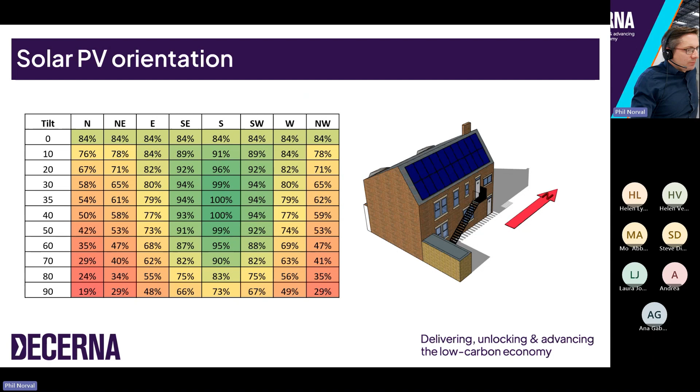So some quick pros and cons. Some benefits of solar PV: firstly, they're extremely reliable. You can easily expect a 25-year lifespan out of the equipment, and even at 25 years, modern modules are usually still going to be operating at about 80-85% of their designed performance. So there's very little maintenance required to keep them running at that level of performance as well. The actual energy output of modules is pretty easy to predict.

There's freely available data on the amount of sunlight available in any location in the world over a year, and so you can quite easily simulate how much energy any given solar system design is going to put out over a year. And so developing a business case for a solar PV system is pretty straightforward in a lot of cases.

There's pretty straightforward energy savings to be had. So any kilowatt hour that a solar PV system generates, if you use it on site, that's a kilowatt hour of grid electricity that you don't need. And so there's a pretty straightforward benefit in terms of energy savings from the grid.

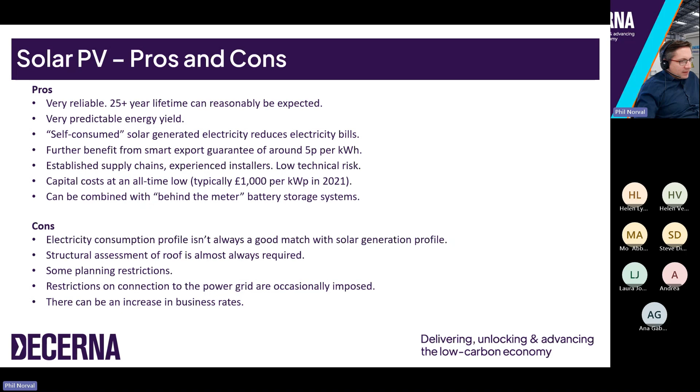I'll just very briefly touch on solar thermal. It's something, if you're familiar with going to the Mediterranean, you'll see on almost every rooftop. In the UK, it's far less popular. It can still be pretty effective in providing buildings with hot water, but it can be quite expensive.

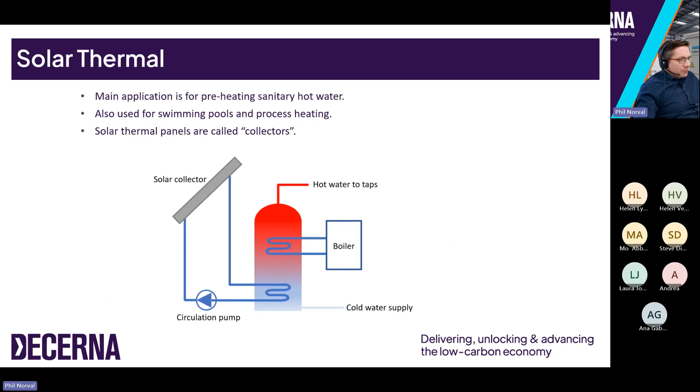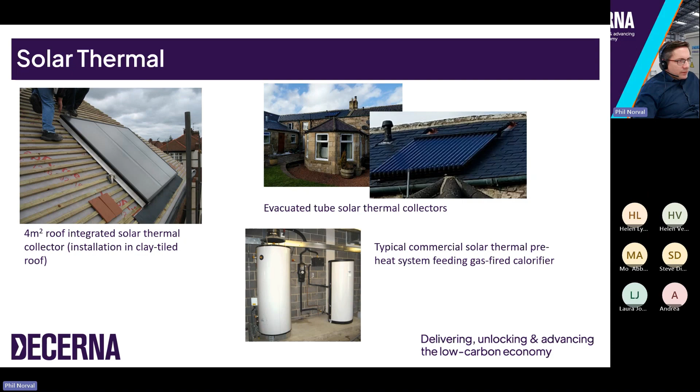In this part of the world, solar thermal is much less popular than solar PV. Although the systems themselves are pretty efficient compared to solar PV, the cost of the equipment is really high in comparison. In some cases, it might work really well anywhere where there's a really high, predictable demand for hot water, especially even through the summer when there's the most sunlight. That's when it might make sense.

But in general, because it's so expensive, the energy savings through having a solar thermal system very often don't recover the cost that's initially paid for it over the expected lifespan. So you could be talking 15 or 20 years payback period for that sort of system.

Again, there are similar disadvantages to PV, things like needing a structural assessment of the roof, some planning restrictions, and there is actually also more maintenance required of this system. It does require somebody at least annually to check that the system is operating and set up correctly. Again, as I mentioned earlier, with hot water, there are some hygiene implications if it's not properly designed and maintained.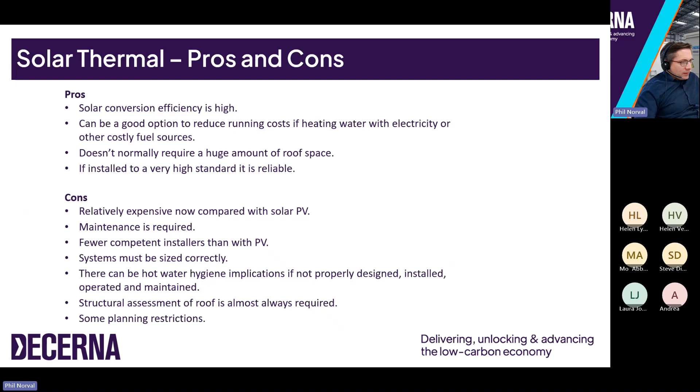Because anywhere where there's hot water being stored, there's a risk of Legionella that needs to be properly understood and avoided in any way possible.

But to give the basic idea, they all work on a very similar principle. They're effectively designed to take heat from one place and move it to another place, but somewhere during that process there's a compressor which causes the temperature to increase, and that's key to the whole system being effective. That's why you can take heat out of somewhere cold like the outdoor air and provide useful heat in a warmer space, such as inside a building.

There's a heat exchanger outside. Air is blown over the heat exchanger, and on the other side of the heat exchanger is a fluid called a refrigerant, which has a low boiling point below the temperature of the outdoor air. So when the air is passed over that heat exchanger, the refrigerant will evaporate and start flowing around the system. As it evaporates, it absorbs heat from the outdoor air, and that heat is carried away with the evaporated refrigerant. It then goes through a compressor.

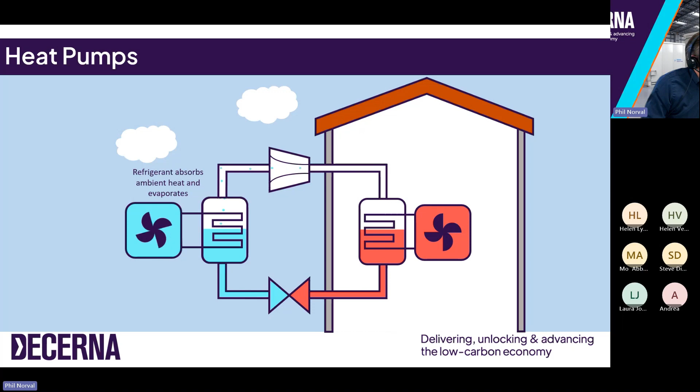The act of compression causes the temperature to increase, which in this case is a good thing. That rise in temperature means that when the refrigerant goes into the building, the temperature of that gas is higher than the air temperature surrounding it. So there's then another heat exchanger inside, which allows that high temperature gaseous refrigerant to dump its heat into the air via that heat exchanger.

As it dumps its heat, it condenses back into a liquid. It's still at high pressure, but now cooler. So the high pressure liquid refrigerant continues on its way round to what's called an expansion valve, where it's allowed to depressurize back to the pressure level it was originally at. So you've now got cold liquid refrigerant back round to the start of the loop, ready to absorb heat from the outdoor air again. It's a continuous loop that keeps going round and round. But that's the basic principle of how a heat pump works.

It's the same process as a fridge or a freezer, but it's flipped around so that you're benefiting from the heat output rather than the cold side.

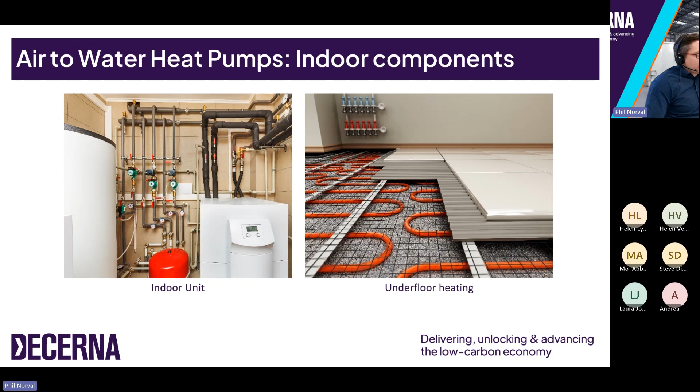The temperature of the water that comes out of a heat pump, for the system to work efficiently, is generally considerably lower than you might get from a gas boiler system, for example. Lower temperature means that to give a certain power output to maintain the desired room temperature requires a much larger amount or size of heat emitters. So if you've got radiators, you might need to double the size of the radiators or double the number of them, or use something like underfloor heating where there's a really large heat emitting surface area, so that lower temperature can effectively heat the space in a reasonable time.

Air to water heat pumps have an important characteristic to mention about heat pumps in general. They use electricity to operate, to run the compressor and the fans. They don't use electricity directly to heat the room.

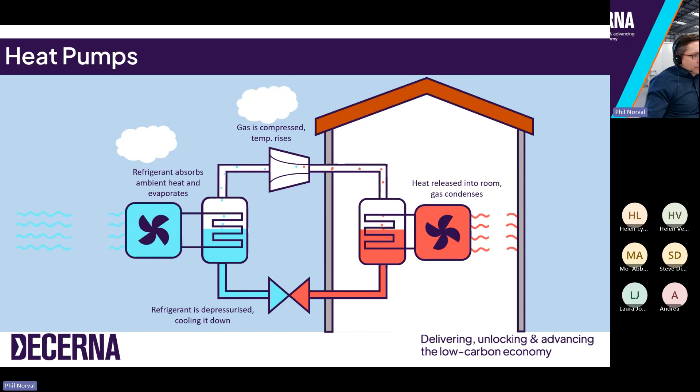For every kilowatt hour used to operate the system, they tend to shift 3 or 4 kilowatt hours of thermal energy from the outdoor air to the indoor air. That ratio of 1 kilowatt hour of energy used to 4 kilowatt hours of heat is called its coefficient of performance, and that's the key to their efficiency compared to something like direct electric heating.

If you're replacing direct electric heating with a heat pump, your energy consumption will go down by that coefficient of performance ratio—so a third or a quarter of your energy consumption—and similarly the greenhouse gas emissions will go down by that sort of ratio.

If you're replacing something like a gas boiler system with a heat pump, the carbon emissions will go down a lot, but the cost of running it may not go down as much, because gas is typically much cheaper per kilowatt hour than electricity—it's quite likely gas could be only a third of the cost of electricity. So if you only need a third of the kilowatt hours but it's electricity, it's going to be about the same price as using 3 times the number of kilowatt hours of gas. So the cost benefit, if you're replacing an efficient gas boiler system, might be a bit marginal at the moment.

The heat pumps, if you keep them simple, air to water heat pumps can be very reliable. The key is simplicity though. If you try to introduce other sources of heating, like a boiler system, or try to get it to do fancy things with hot water as well, or have other features that make it more complicated, that's when heat pumps become a bit less reliable and hard to understand. But the technology is very well proven. There's quite a bit of negativity around them in the UK, but they've been proven for decades elsewhere in the world, particularly in Europe, where the industry is very mature, and they do work if designed and installed properly.

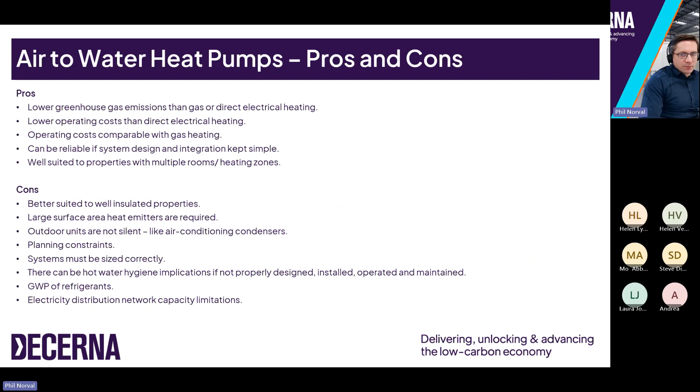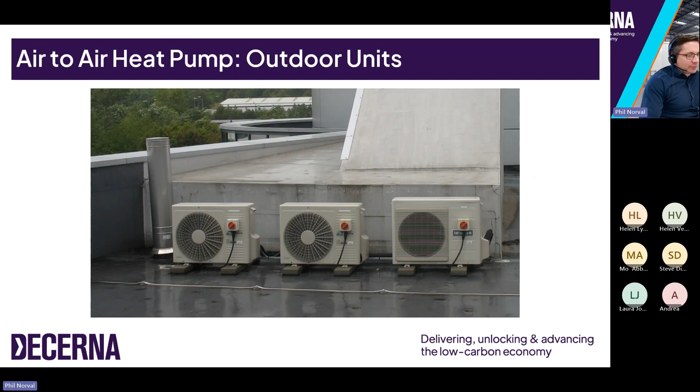Air-to-air heat pumps—the diagram and animation we showed earlier was an example of this. Basically it's an air conditioning system, but when we say air-to-air heat pump, we're talking about the provision of heating rather than cooling into a space; otherwise they're basically exactly the same thing. Modern air conditioning systems can run in heating mode or cooling mode.

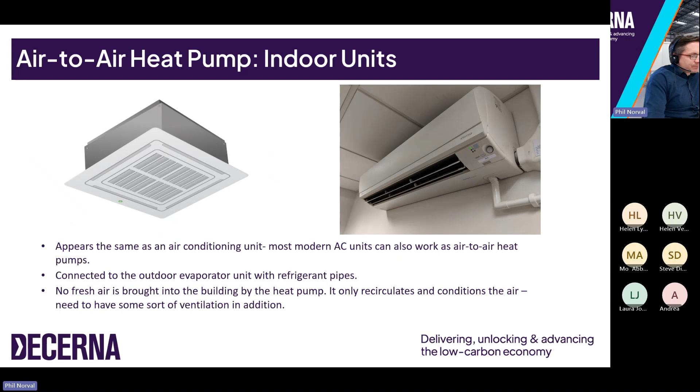Similar pros and cons to air to water heat pumps. They are usually slightly more efficient than air to water heat pumps because there isn't that extra stage of having to put the heat into water. You're just directly putting it into the air. So they're a bit simpler and a bit more efficient.

Again, the running costs, though, similar considerations to do with whether you're replacing direct electric heating or replacing gas heating. The cost savings might be extremely modest if you're replacing a gas heating system with air to air heat pumps. They're usually very simple. It's just an outdoor unit connected to an indoor unit via some refrigerant pipework. So they can be installed in a multitude of different situations. And the other benefit is, of course, that they can provide comfort cooling in the summer as well as heating in the winter.

With air-to-air heat pumps, as you might imagine, the cost of an indoor heat pump unit is much higher than the cost of a radiator. So buildings with lots of individual rooms that might need lots and lots of individual indoor units could get very expensive. So it might be worth in those situations to consider an air-to-water heat pump instead. Otherwise, similar considerations to bear in mind as with the air to water systems.

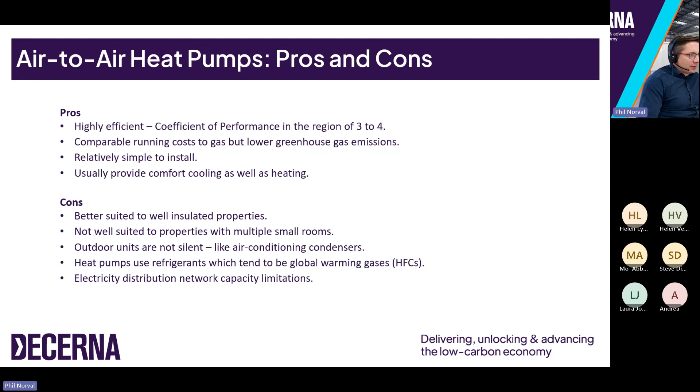Finally, ground source heat pumps. People used to get quite excited by them a decade or so ago, because they traditionally have a higher coefficient of performance than air source heat pumps, because the ground temperature is much more stable and the heat exchange is more effective. So they traditionally have quite a high benefit in terms of the energy efficiency, but these days, compared to modern air source heat pumps, there's not that huge a difference, but the cost difference is massive.

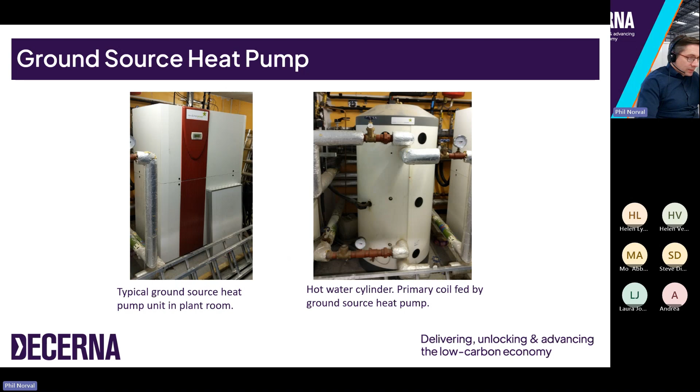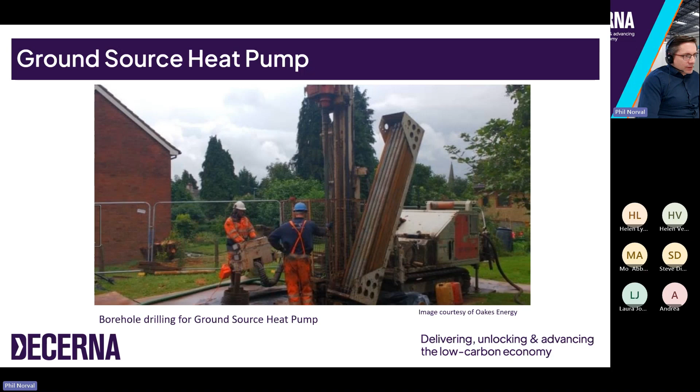A ground source heat pump, as you can see here, uses quite sizable equipment. You have to either dig up a large area of ground to put in the pipework that collects the heat, or you have to drill vertical boreholes, which are very, very expensive, thousands of pounds per hole. The overall cost of a ground source heat pump is very, very high, especially compared to air source heat pumps, for only a modest gain in performance.

Otherwise, at the end of the day, it's another kind of heat pump. So some of the benefits are the same as with the other forms of heat pumps, such as lower greenhouse gas emissions, lower operating costs, especially compared to electrical heating. Very reliable systems, as long as they're kept simple, once again. But the other similar disadvantages as well, and the major one is how expensive they are, particularly due to the groundworks that are required. And hence, in this country in particular, they're really not very popular unless it's done on a big scale.

So that really is it, and that's a quick whistle stop tour of renewable energy systems, just to give you a bit of a base level of knowledge if you are considering any of these large capital projects. Doing it properly is the quick win in this situation. If you're committed to installing some renewable energy, just being armed with a bit of knowledge is the way to do it properly and the way to get the most out of it.